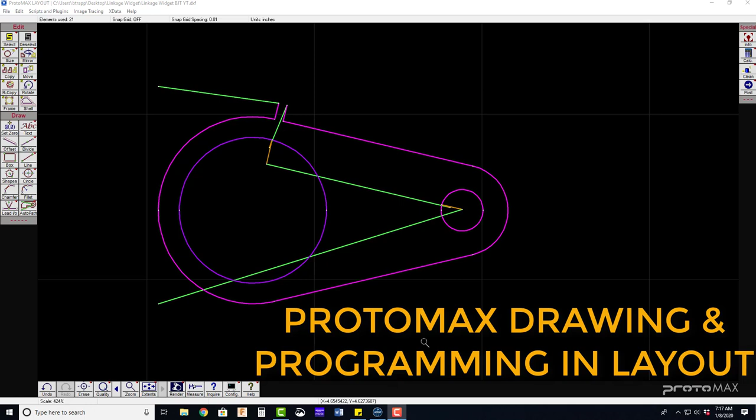I'll be showing you how to draw this linkage widget in the Protomax layout software and program it for the water jet. I'm going to start by going File, New Design.

It starts off with a circle anywhere on this cutting grid, left click, and it has a diameter of 0.880, typing in this window right here for the diameter, pressing enter.

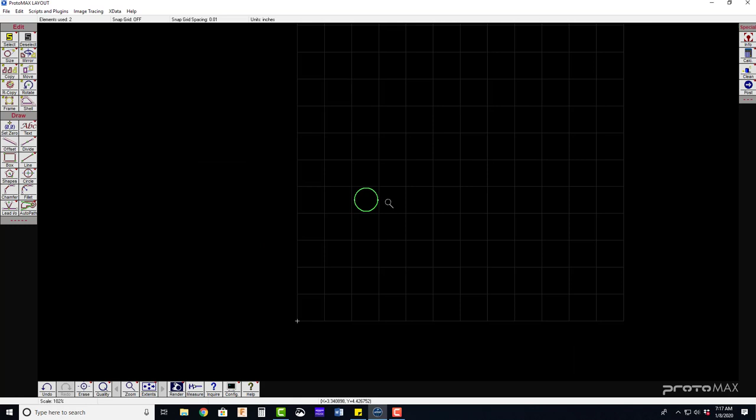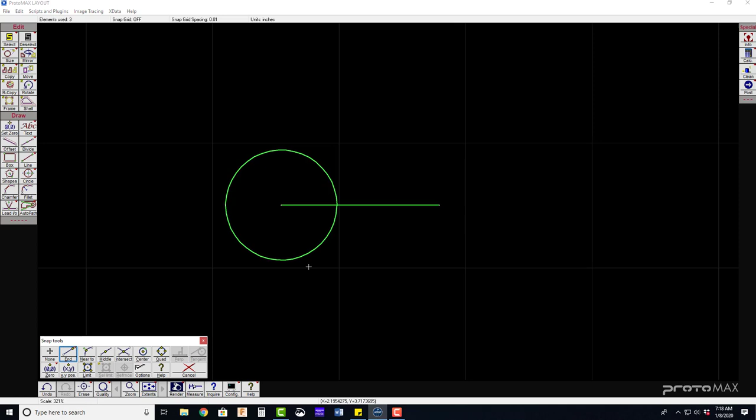Going to zoom in a little bit and draw a line from the center, picking up this center snap of the circle, directly to the right horizontally, a length of 1.250, pressing tab on the keyboard to type in the angle window, and that's going to be an angle of 0, pressing enter. I'm going to repeat the process with another circle, snapping to the end of this line segment and having a diameter of 0.250, enter.

We now need to offset these two circles, but they're at different dimensions. The offset tool is located on the left side. Type in a value. First offset value for the left circle is going to be 0.125, and then you're just going to click just on the outside of your geometry you want to offset.

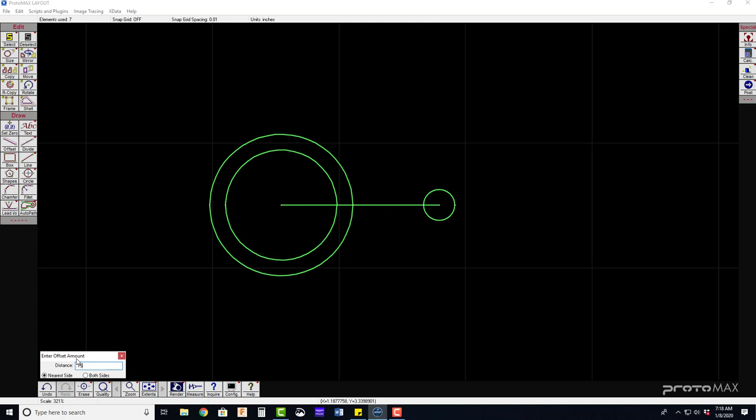We have to do it 2 times because this line is splitting the circle into 2 segments. For the second circle, we need to change our value to 0.150, and then once again, left click just a little bit on the outside of our geometry.

We now need to go to the line tool, and we're going to draw a line that's going to go directly from the top of this circle, nice and smooth, and transition to the bottom circle, the smaller circle, with a tangent snap. So we're going to turn on our tangent snap, and that allows us to snap tangent to this circle. Notice you can see the tangency.

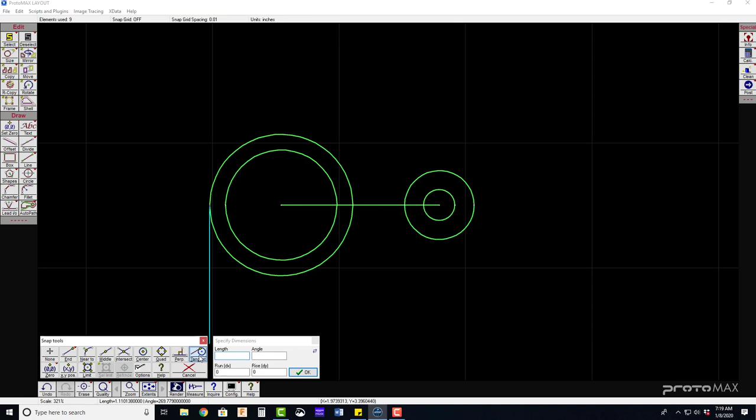We also need to do that a second time to make sure we tangent snap to the smaller circle. Repeat that command: line tool, tangent, click, tangent again. Make sure you don't forget that second tangent snap. And then we need to go into our erase tool and click on the geometry that we do not need for our widget.

That is how you draw it. To program it, we're going to first create a tab. Since this is a relatively small part, it needs a tab so it doesn't get dropped into the tank on the water jet. Right click on the lead in, lead out button.

Click create tab. We're going to go into our tab options and verify that we have an A part side gap at 0.05, C tip side gap 0.05. Uncheck the box, use part of tab for leads. Actually, check that box, that's what we want.

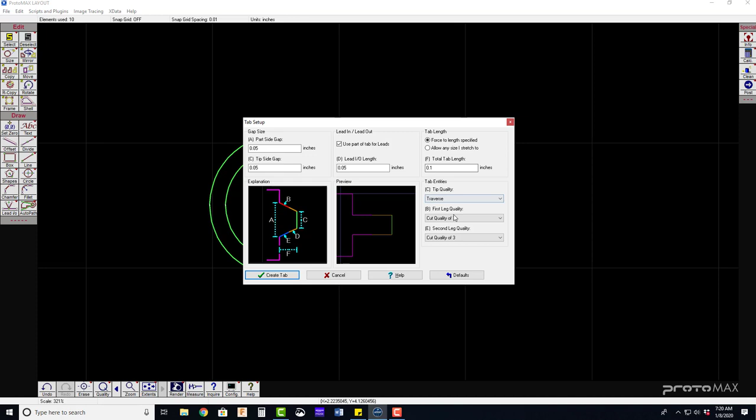And then we will have a lead in, lead out length of 0.05. Forced to specified length is fine. 0.1 is the total tab length, and the cut quality traverses are fine. Click create tab, and then we're going to position our tab right here on the top, somewhere where it's nice and easy to deburr.

Now that we have our tab, we need to assign cut qualities. With the cut qualities down at the bottom, left click. 1 being a rough cut, 2 medium rough cut, 3 standard machining, 4 high quality finish, 5 very high quality finish. Higher the finish, higher the quality, longer it's going to take to cut out, but technically better part.

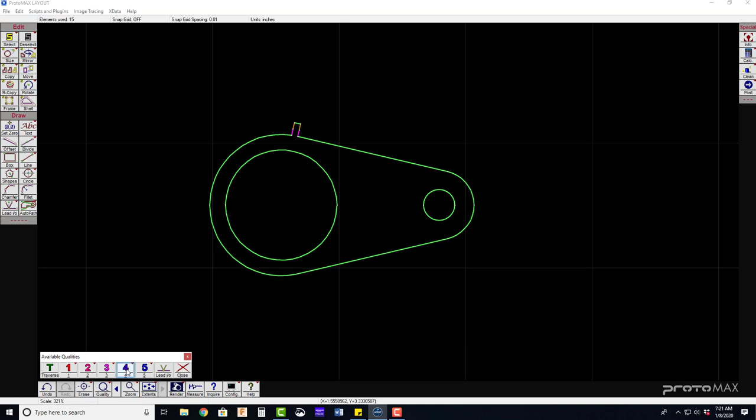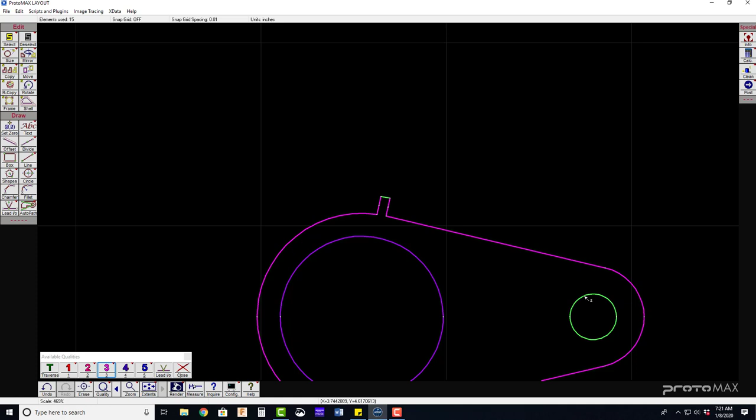So we're going to do the inside large circle at a quality of 4, and then the outside is going to be a quality of 3, and that will also include the segments for the tab. This segment is left green because that's a traverse where it's not cutting. And this small hole will also be a cut quality of 3. So that's the cut quality.

Now we're going to go into path. We're going to right click on auto path to go into auto path advanced and configure, giving us a few more options. Usually the default option is totally going to be great, where we have our origin starting at the bottom left.

It's going to traverse and cut out the small circle and then cut out the large circle, and then it's going to pierce up here at the tab and go all the way around and end over here, and then it's going to jog kind of out of the way a little bit. That will give us access to remove the part. So we can go ahead and click OK.

If we need to change any of these locations, you basically switch these starting and end points around, and you can see how the preview gets updated. Go ahead and click on the checkmark Go.

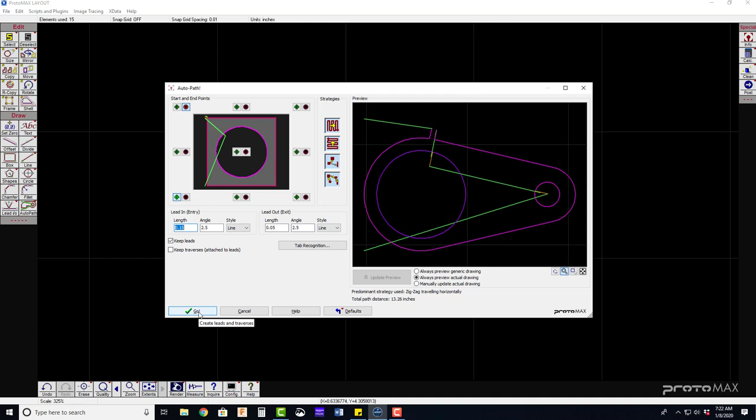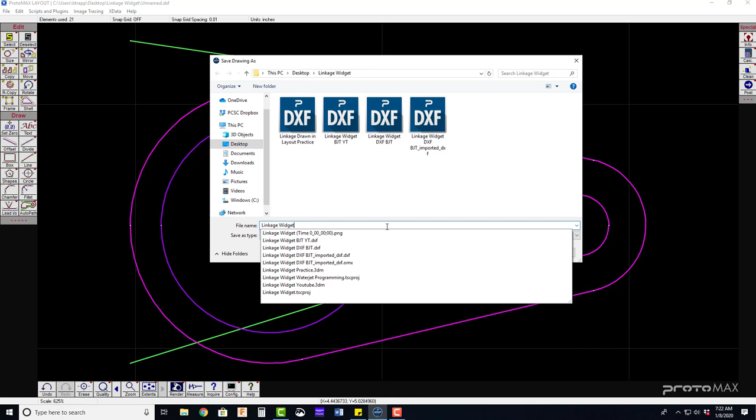Now that we have our geometry, we have our cut qualities, we have our toolpaths, we now need to post it. But first, save your file. This is going to be called Linkage Widget to your initials. It gets saved as a DXF file.

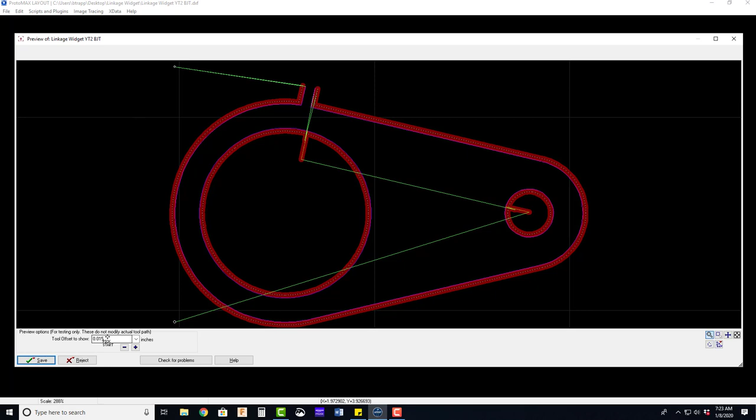Now for the post, I need to pick the start point, which is going to be our bottom left hand point, the origin. We now actually can see our nozzle toolpath where it starts, goes into here, starts, pierces, stays on the appropriate side of our geometry, and so on. We'll leave our tool offset at 0.015. Click Save, and that file is ready to be cut on the Protomax.

To verify that we have that file, you would open up the Protomax Make application. Looks like I already have it, but that was the last part that I just loaded, so I'm going to verify. I'm going to go File, Open, and then I saved it as this one, Linkage Widget YT2 BJT. That was the one I just created.

We don't really need to worry about our material settings right here in the classroom, but it is absolutely critical in the water jet. We will be cutting this out of aluminum 6061 with a thickness of 0.125, so go ahead and take care of that right now.

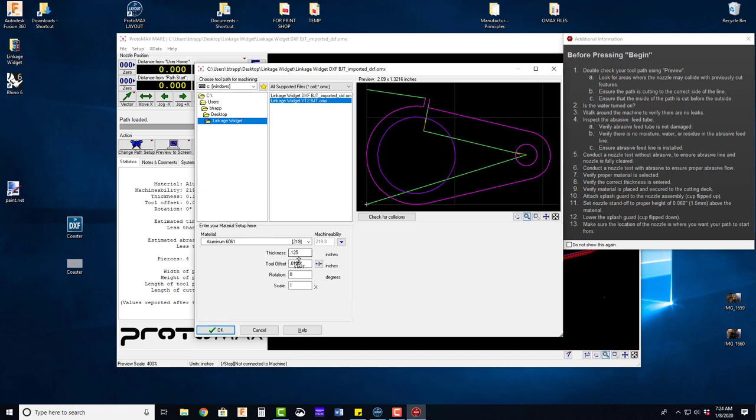And we have our file, and we also have some statistics that we will print where it's going to take less than 2 minutes and use less than 1 pound of garnet with 4 pierces and a total cutting length of 9.09 inches. Thank you for joining me.